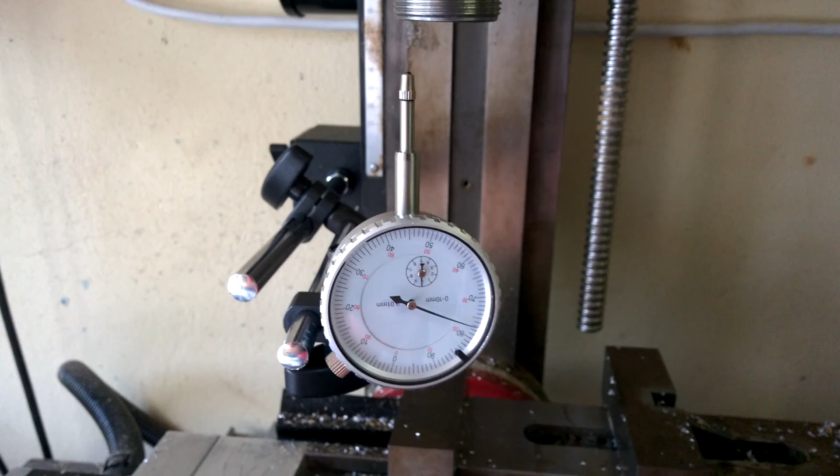You know shit gets serious when the dial gauge comes out.

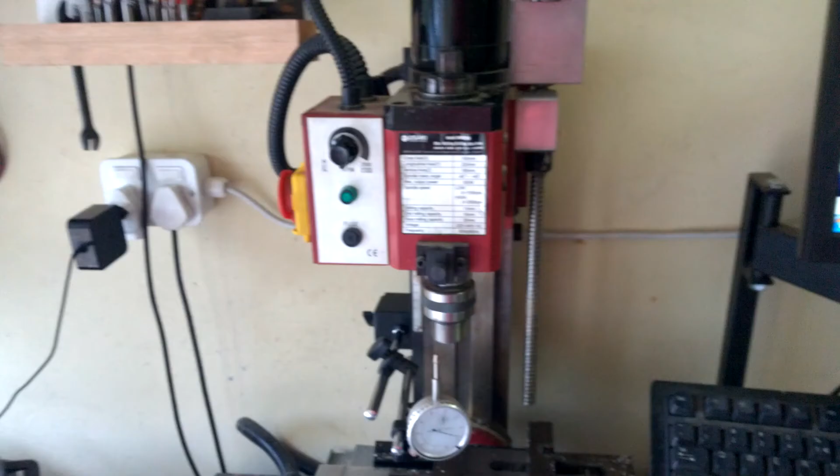I was very happy when I first got the CNC. This one, that one right there. Yes, that is a CNC. I was very happy when I got it, but it is rather old, and by rather old I mean probably upwards of 15 years old. So while it was probably really good when it was first built, since it is a mini milling machine, literally just called the mini milling / drilling machine.

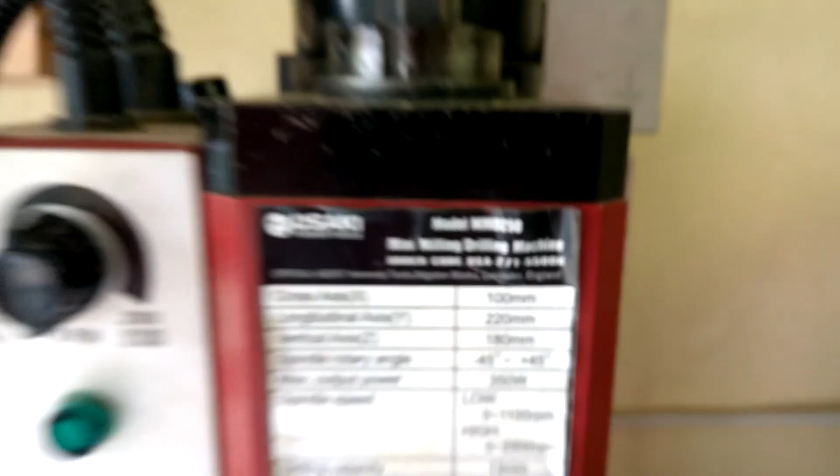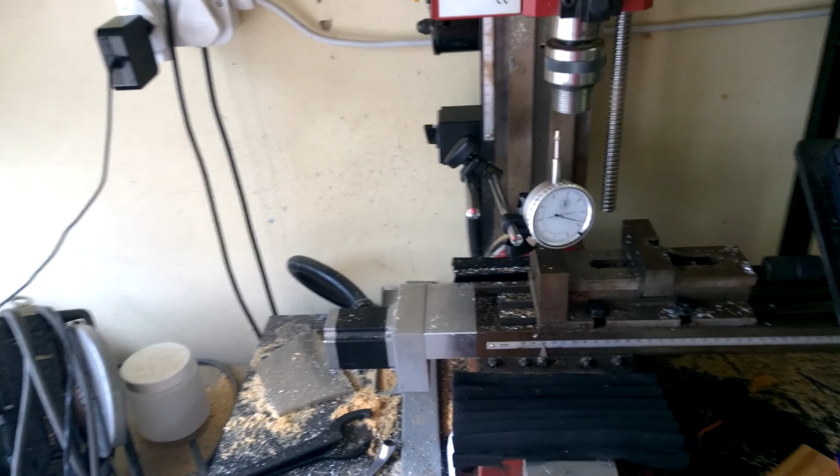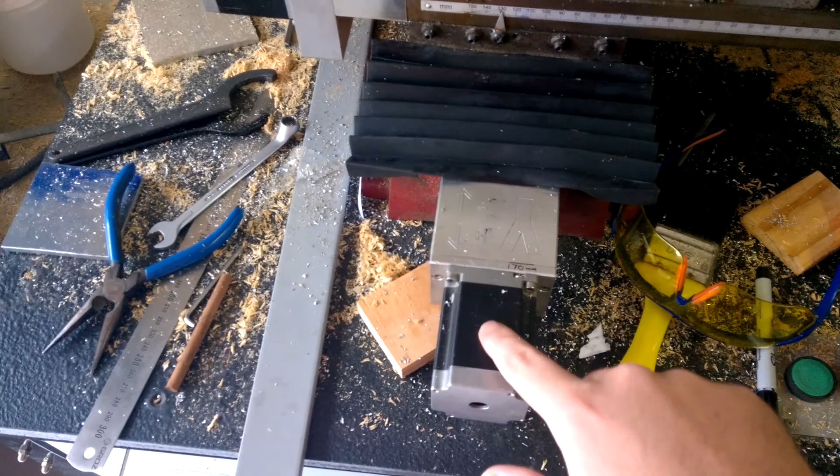It was converted into a CNC by a company local here, and that's great. It works, not perfectly, but it works very well. Only thing is, I have been having a lot of problems with overall accuracy. I tried just doing a circle, which is supposed to be a certain diameter, and it ended up being not that diameter, even after meticulously measuring the pitch and working out the steps per millimeter for this.

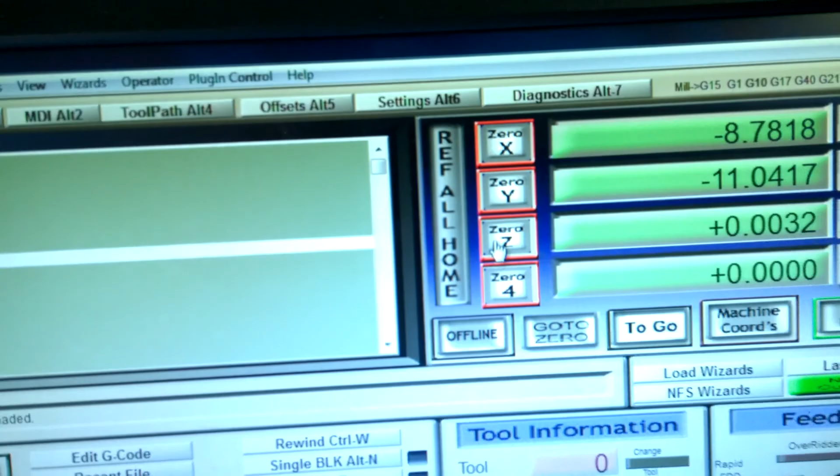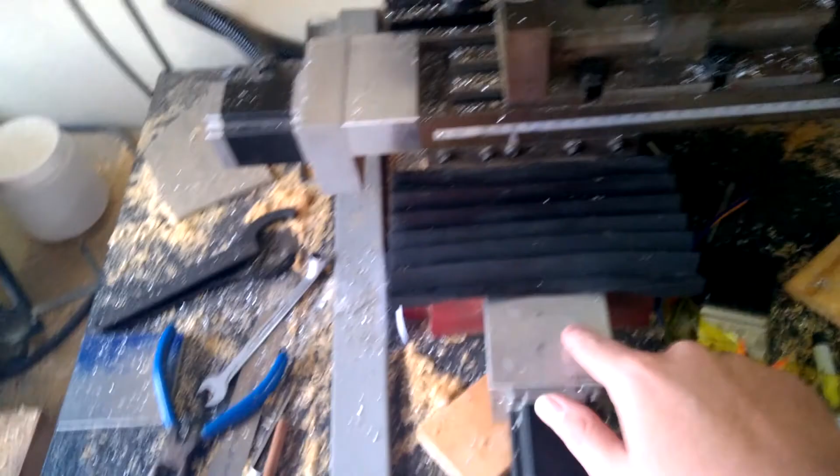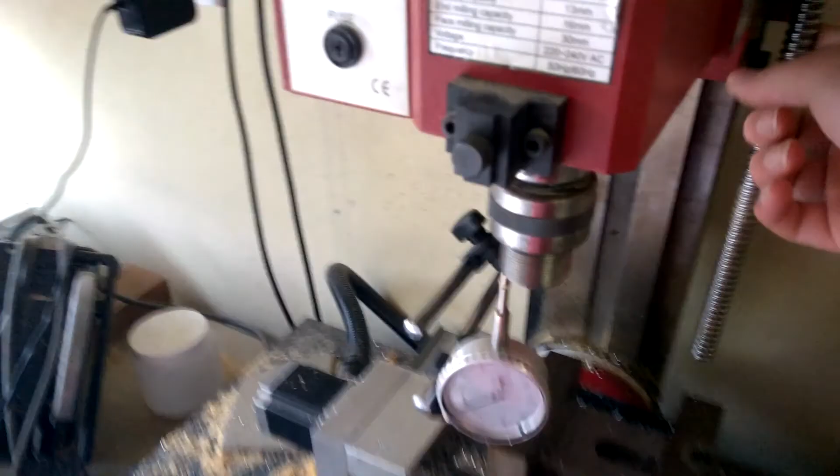And even after tightening the gibs, which were a pain in the ass because there's this aluminium bracket that covers up two of the gibs. So that was fun. These are ball screws, but I think over the years they have just sort of lost their, I don't know what the word is. They've worn down, or they need to be re-greased or something. They've lost their accuracy. So I could replace the ball screws, which I probably will at some point, but that is probably going to be a monstrous task.

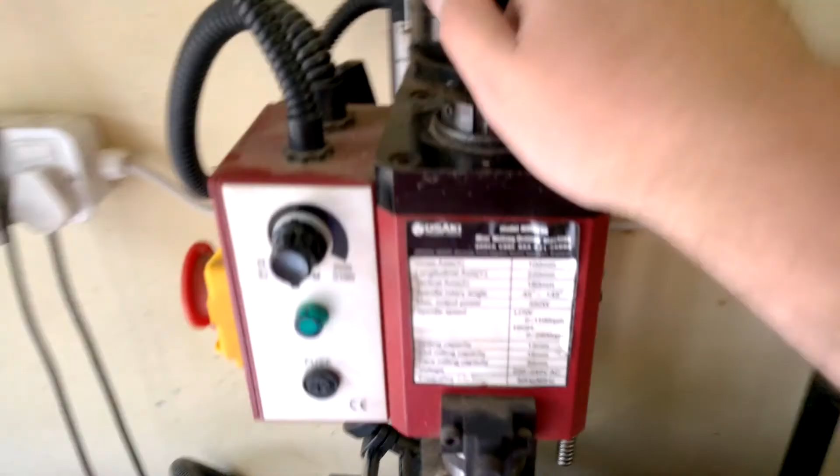And the ball screws themselves aren't that cheap. Replacing all of the ball screws will probably cost around 2,000. In South African currency, it's about 2,000 rands, which roughly equates to somewhere around $170, but it's not cheap. That and just a couple other things. The collet holder retaining nut, that's completely stripped.

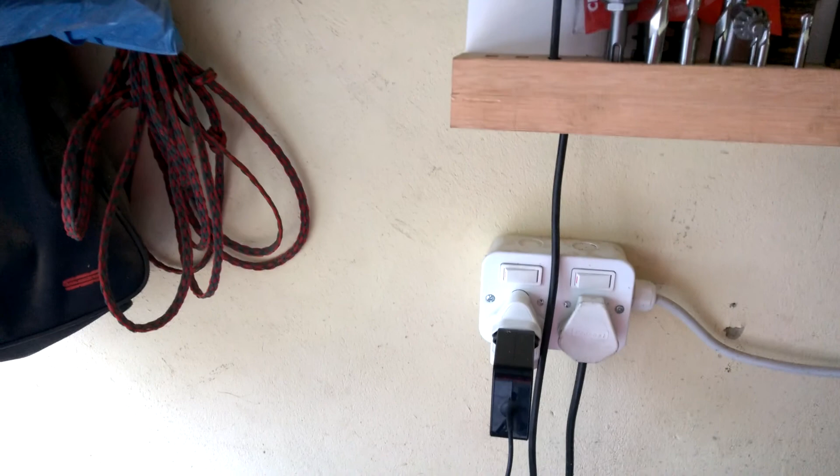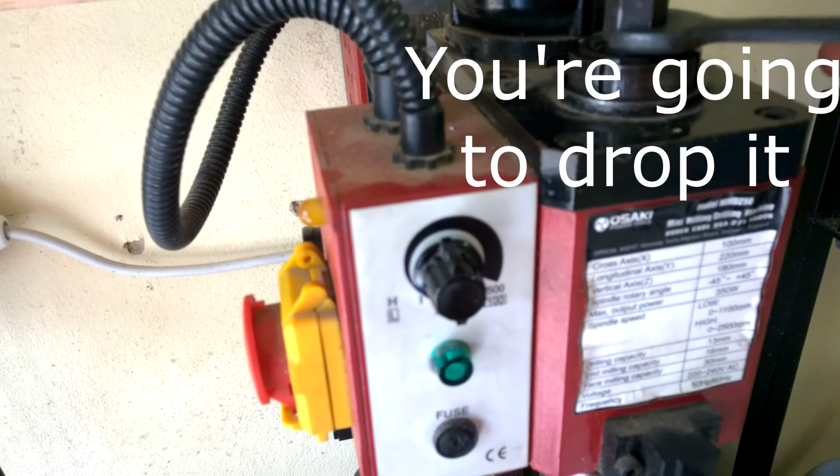Let me see if I can do this with one hand. That's going to be interesting. How the fuck am I going to do this with one hand? Okay, so that has to go that way. That has to go there. Oh god, this is going to be interesting. Is that right? Yeah. Fuck. Okay. So that should go there, and that should loosen. There we go. That loosened it enough, I think. I don't know if I even got that on camera. I was actually trying to get it out, so sorry.

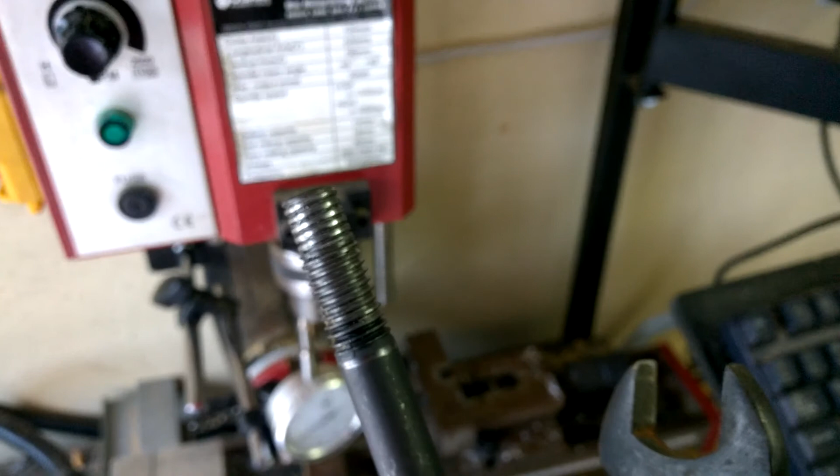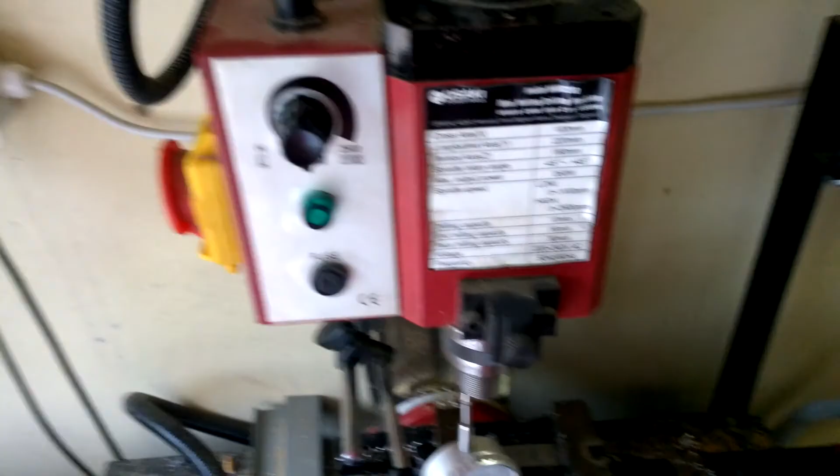But you can see those threads. Come on, focus. Those threads are fucked. But I think what happened at some point is someone cross-threaded it going in. Or someone put it in, threaded it, and tried to bang out the collet holder.

But I think it's okay because it's really rough most of the way. But then here, they thread in really nicely. So that sort of tells me that when it actually threads all the way, it's actually contacting all the threads. And there goes my thing.

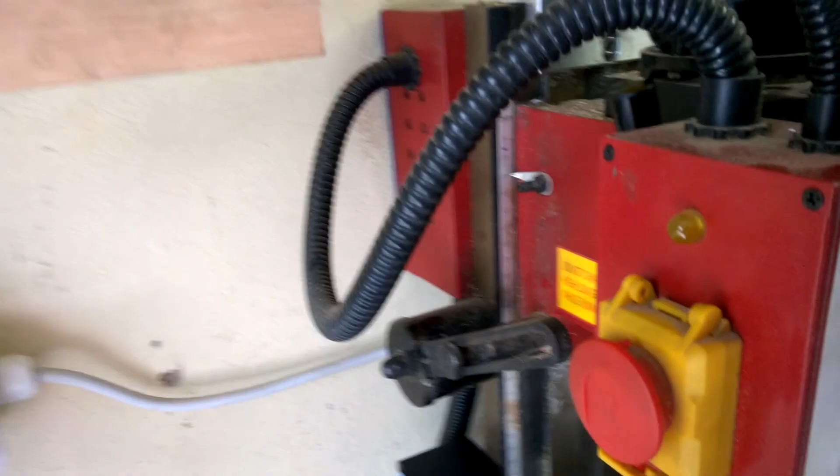What that tells me is when it's actually threaded all the way, it's contacting only good threads. Which is good, but with how much of a mission it was trying to get that out, I don't think it's going to come out even if that's completely loose. But anyway, that's another thing that needs to be done.

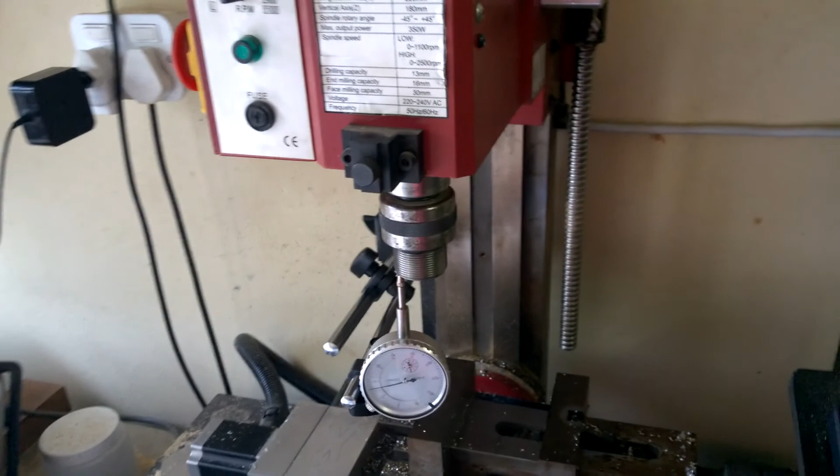Let me show you what I mean here. Right now I've got no backlash compensation on. What I am doing is going up and then down until I get past the backlash. There you can see I'm past the backlash going down. And I'm just going to get onto 0.

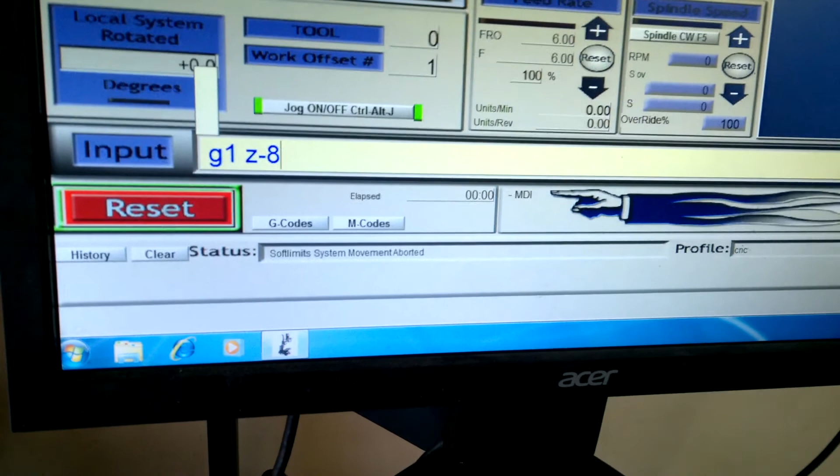With no backlash compensation added, I am going to go G1, Z, -8, F100, because it's a dial gauge, I don't want to completely mess it up. Oh, shoot. G1, Z, -8, F100. So it's going to go down 8 millimeters at 100 millimeters a minute, which isn't that fast. So it should go around 8 revolutions exactly.

As far as I know, the ball screws on X and Y are exactly the same as the ball screws on Z, which admittedly they may not be, but I can't easily measure those. So this should go around 8 times.

And you can see there, each little tick on those dials is 0.01 millimeters. So that is off by 0.05 millimeters. So that's 0.05 millimeters too little because it's backwards, so clockwise is... anyway, 0.05 is too little.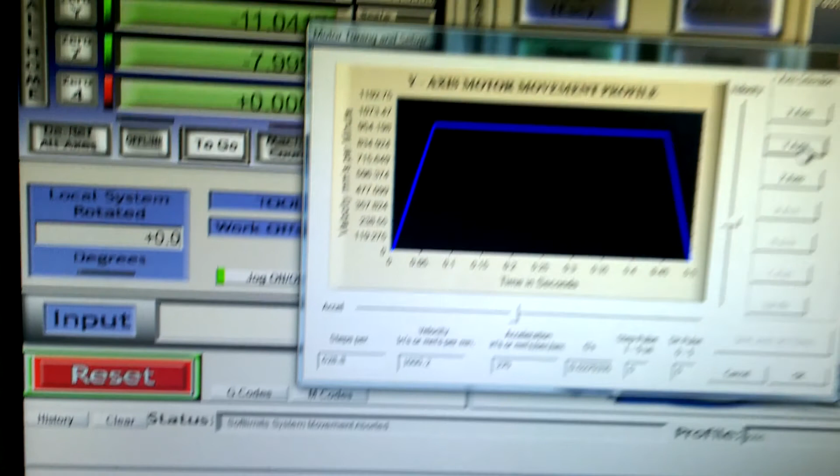So, motor tuning, you can see I've got the X - if it'll focus, there we go - the X, Y and Z. I've got the steps per millimeter exactly the same. That should, in theory, mean that they will move the same.

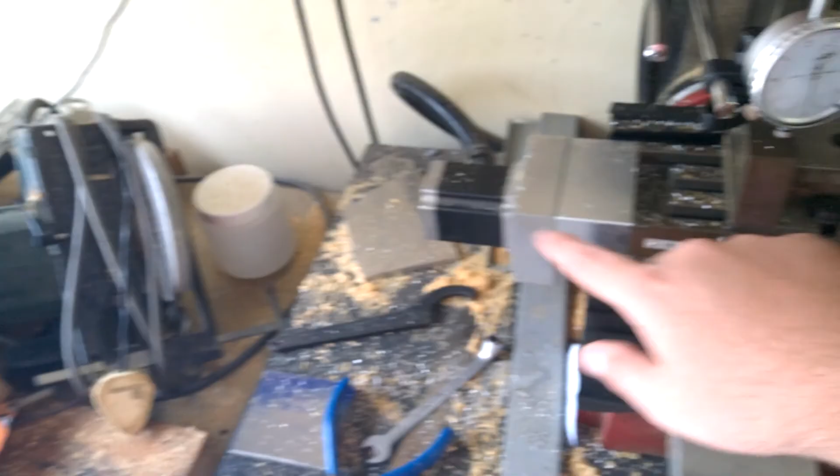I'm not going to reset the dial gauge now, I'll probably do it at the end, but when I move X and Y 8 millimeters, they move exactly 8 millimeters. And with backlash enabled, doesn't matter which way I move them, they still move exactly 8 millimeters.

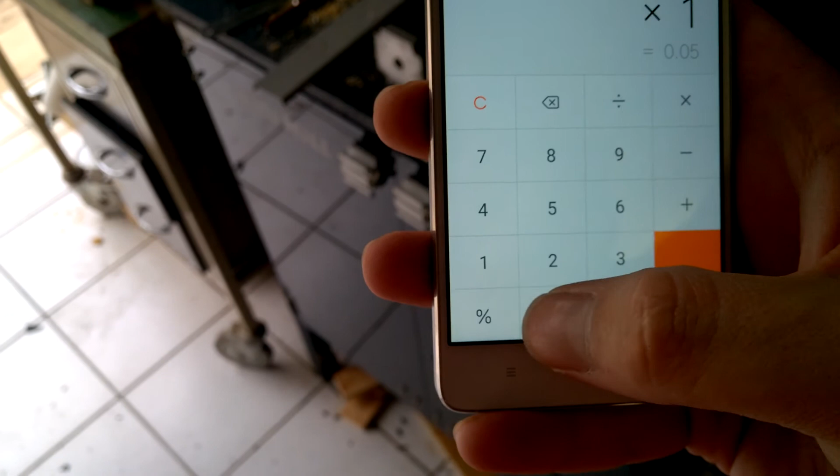So that tells me that if - let me just get to a calculator, and I know this isn't a perfect calculation - but it's supposed to move 8 millimeters and it's moving 7.95 millimeters. So, if it'll focus, 0.05 times 100 divided by 8 equals...

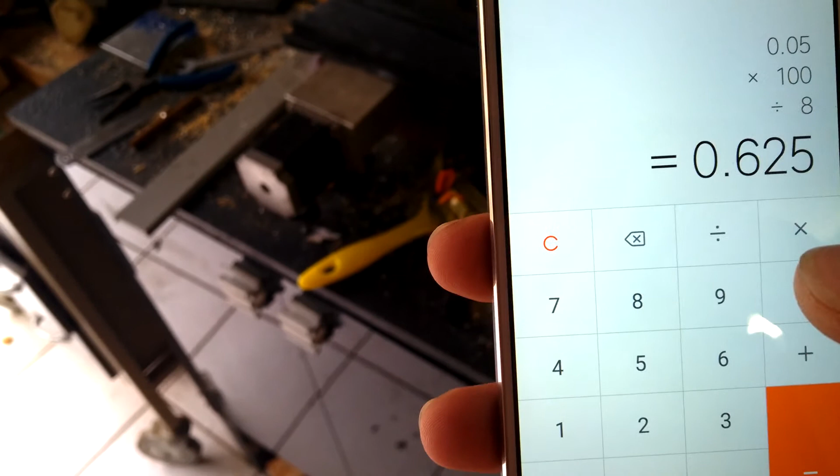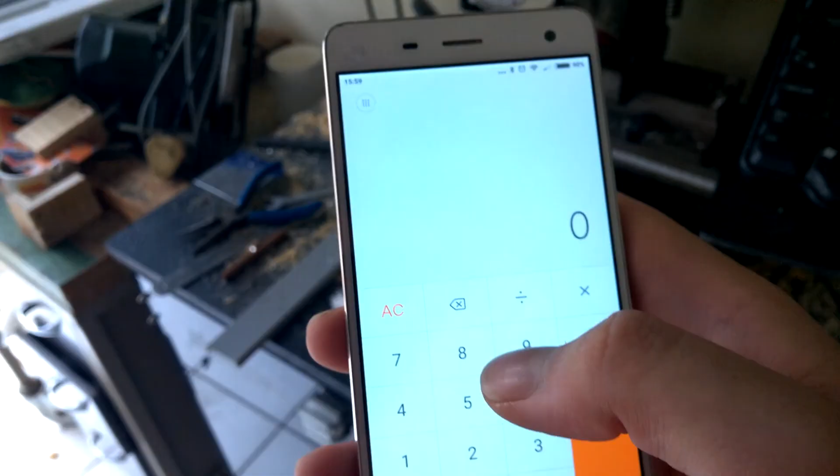So it is 0.625% too little. So I take that - 628.8, which I measured doing similar calculations. So I go 628.8.

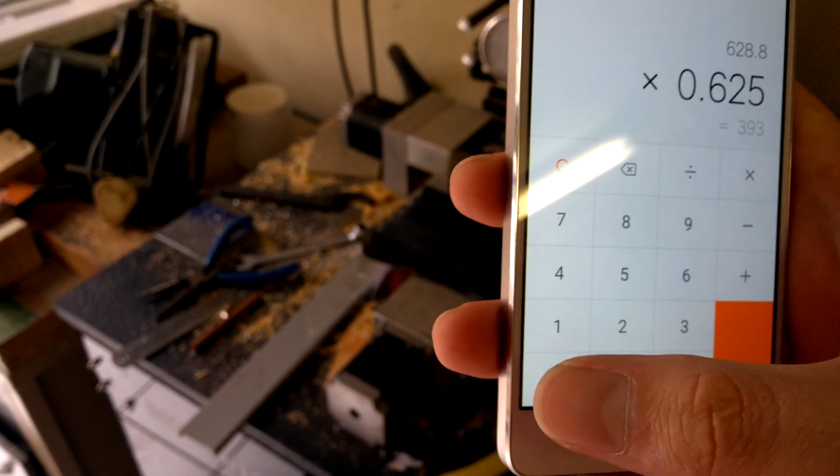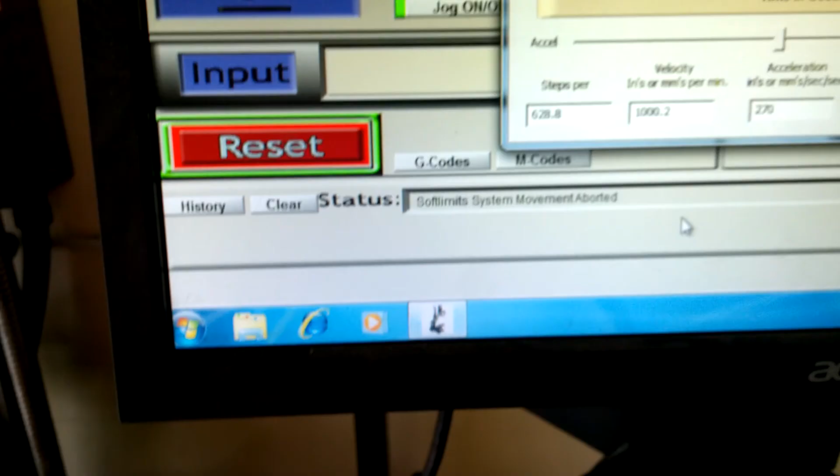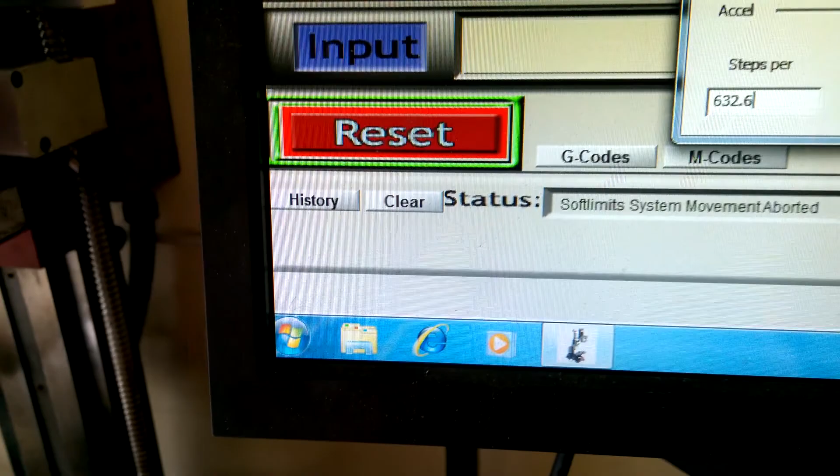632.6, make sure it's for Z. Save. Okay, and now rerun tests. Again, this is to make sure the steps per millimeter are correct without backlash - I'm not adjusting the steps per millimeter to include the backlash, which will mess up my actual movements.

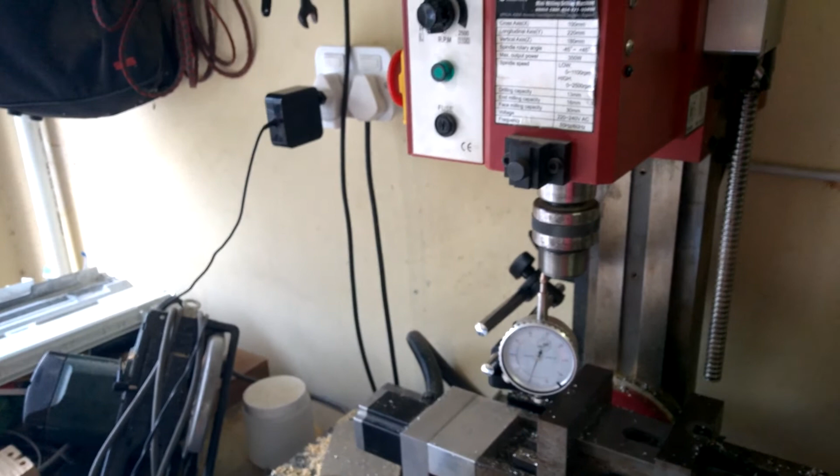Okay, and now I'm going up until it gets to 0, and I say that's Z0, and I want to go to 8 millimeters. And you can see that's a lot closer.

Ain't that cool? Okay, so if I want to go down now, just to check, I zero it, and I want to go down another 8 millimeters. Yeah, that's still not great, but it's better than what it was.

Let me just make sure, do a sanity check that I was doing that correctly. Go up 8 millimeters - you can see that's very close. Sorry if this isn't really in focus, I'm trying to record this while actually doing it. So I want to go down 8 millimeters, let's see if it does that again.

Now you can see that's within 0.03 of a millimeter, which is... so 0.1 millimeters is 4 thousandths of an inch, so 0.03 millimeters is within 1 thousandth of an inch, which is pretty good.

So that's not perfect, but I'm going to accept that, because this whole thing - you can see if I move that, the actual head moves. I've tightened up the gibs but I couldn't do it properly. Anyway, you can see if I move that, it moves about that much, maybe a little bit more. So I'll accept that.

So now, what I need to do to adjust the backlash: if I zero Z and then go down, so I know there's no backlash in that direction, and then go the other direction, just gently - so there, you can see the backlash is about 0.12 millimeters.

So config, backlash, and I go 0.12 millimeters. Okay, and now if I zero it and want to go to 8, let's see what happens.

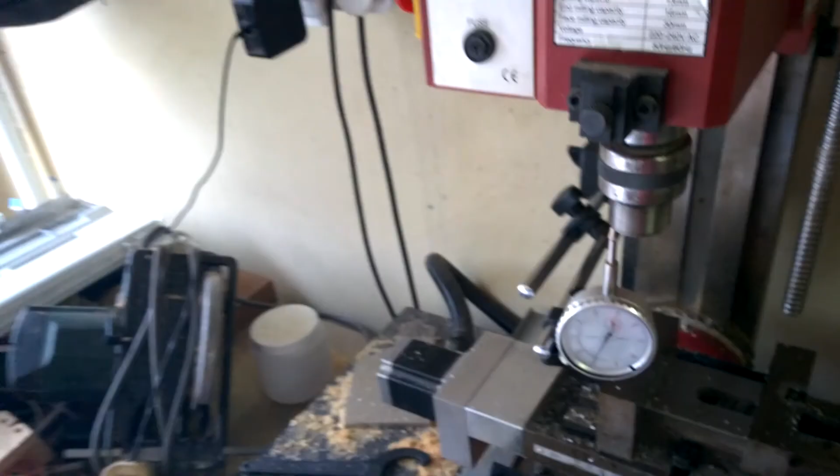Okay, that's good enough, and now if I want to go to 0 - and this is, I haven't changed the height or anything to compensate myself for backlash. Sanity check, going up again. You can see that's within 0.02 millimeters, which I'm going to accept. I don't think there's much else I could really do past that.

This isn't the most precise machine ever. It's meant as a hobbyist machine. You're looking at a hobbyist. That's a hobbyist machine, it's perfect. There's really not much more - I can't really get much better than that. Well, no, I lie, I can.

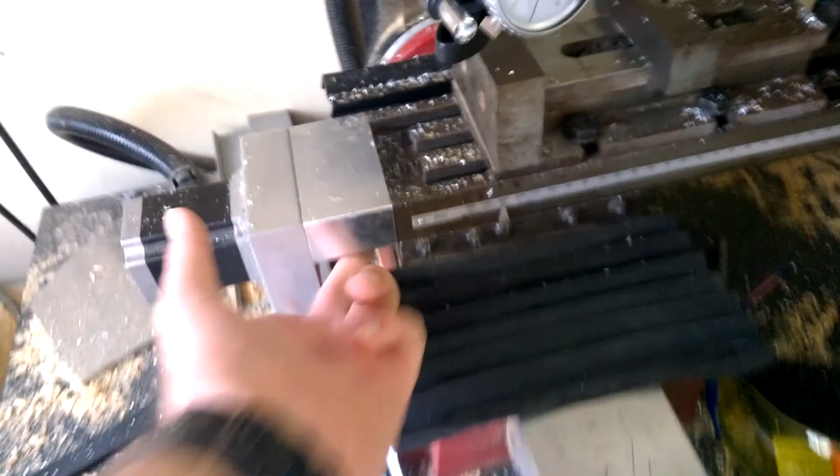I can replace the couplings, which you can see in there. Those are some couplings that they use - those are fine, I thought that was the issue, but it's not. I think it's in the ball screws themselves. If I really wanted to get pedantic about it, I can replace the motors, the couplings, and the ball screws, and true up the head. But realistically, I'll probably do it at some point. But the machine is good enough for now.

So I recorded a little clip of footage of myself doing almost this exact thing before I decided to check for backlash. I'll probably put that little snippet of footage in now.

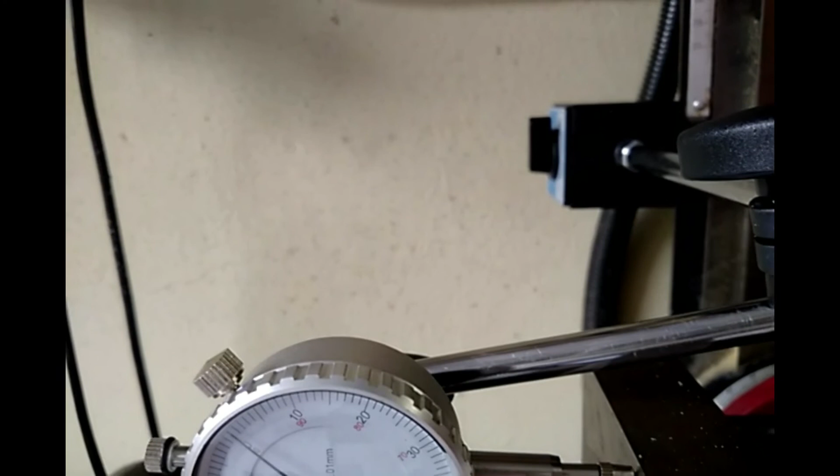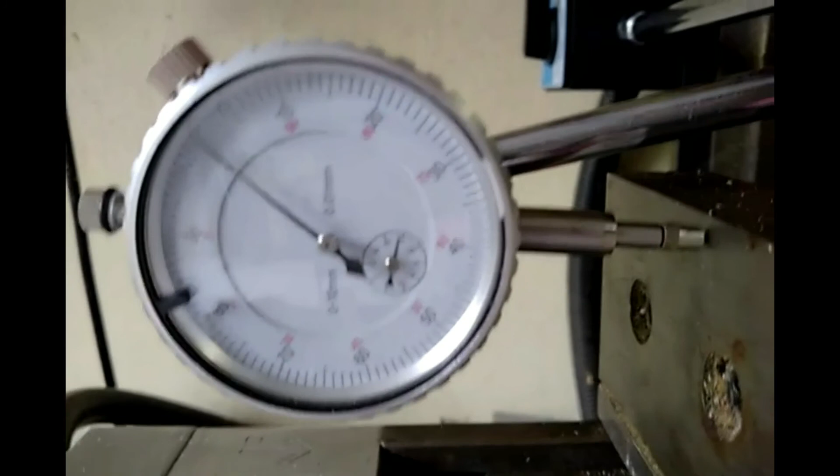If you'll look right now, if it'll focus, it is at 0. What I'm going to do is increase it by 5 millimeters. Come on, why are you no worky? Oh shit, sorry, decrease it by 5 millimeters. So this is going to go down 5 millimeters. Each little line on that is 0.01 of a millimeter.

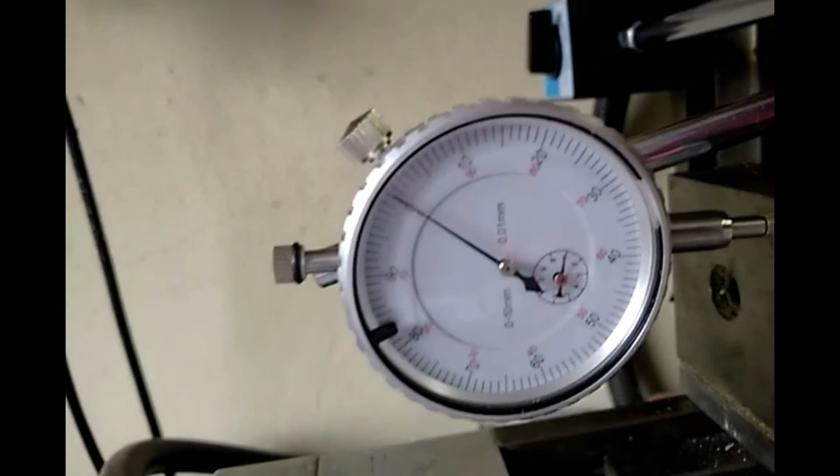How perfect is that? Let me go up again, another 5 millimeters. If that isn't within 0.01 of a millimeter, and I don't know what is, that's fucking perfect. So you can see that was really good.

The problem is I still wasn't getting a precise part because I wasn't compensating for backlash properly. I was compensating for backlash, but with the wrong steps per millimeter, so the parts weren't actually coming out right. So hopefully now that should be better.

I will change around the dial gauge to show you X. I'm not going to do Y because it's a pain in the ass to maneuver it everywhere, but I'll change the dial gauge to show you X. So I'll be right back.

Anyway, let's not linger on our mistakes for too long. So X is zeroed. I am going to move X 8 millimeters from 0. So you should see it move exactly 8 millimeters.

And you can see, without backlash, within... no, not 0.001 of a millimeter - 0.01 of a millimeter.

And now enable backlash. And if I now go to X0, it should be directly on 0. Perfect. Now to 8 again. This is with backlash compensation enabled. Not too great - let's try that again. That's pretty good.

You can see it varies a little bit. This probably isn't the most accurately perfect, precise dial gauge ever, but it's pretty good. So yeah, that's the machine trammed in.

I'm going to load in a block of wood and try to cut a 22mm circle for a bearing for a fidget spinner. So I will stop the video now and I will come back when I'm running the G-code.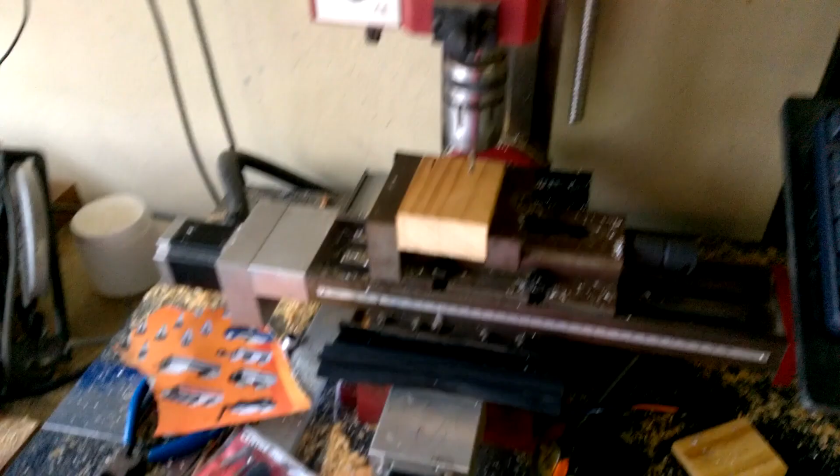Well, would you look at that - a perfectly and strategically placed block of wood, 6mm end mill, and G-code path. Now all that's left to do is to press cycle start and hope nothing bad happens.

Yes, hand on ready, spindle should start. You'll notice, I don't know if you can hear me or not, but there's like a tick every time it changes direction - that's compensating for the backlash.

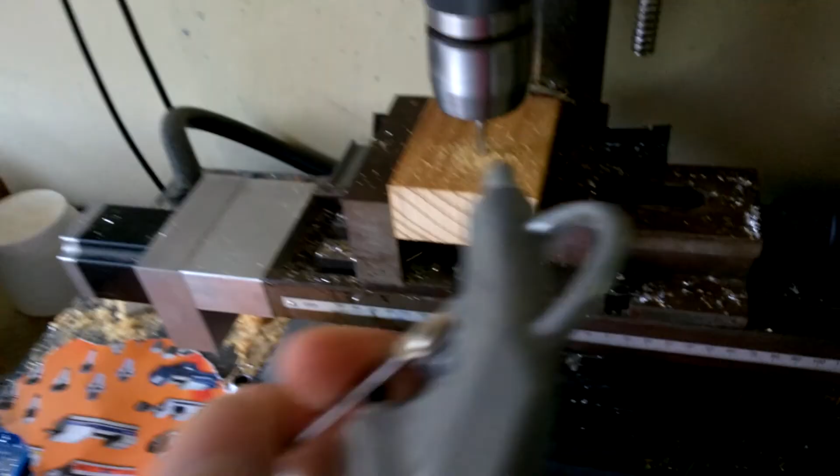And there it's cutting. Just adding some air - don't want to load up too many chips. And you can see there it's cutting the perimeter.

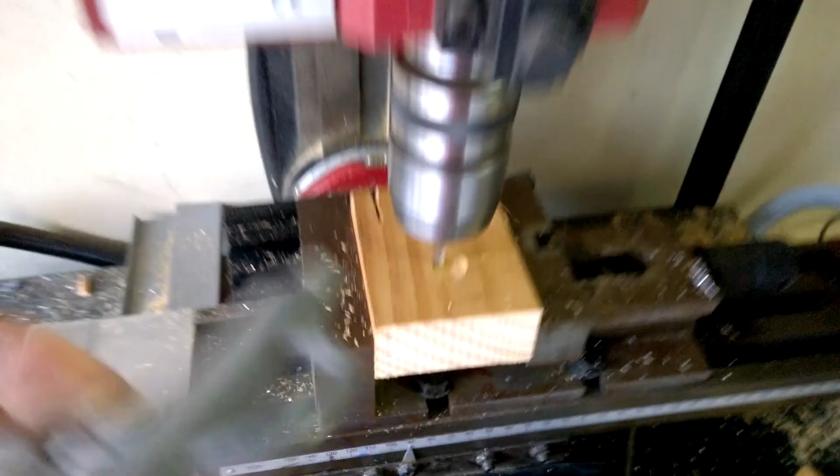I need one of those little things that are attached to here for air, because if I'm running something that's longer than like half an hour, this does get annoying. G-code, it's almost done.

Okay, cycle stop. No one cares about you. Okay, not you, compressor, everyone cares about you.

Let's take that out. Shut off the spindle. Now I can't remember if I added or left some stock to leave in Fusion 360, because that's what I used to do. If only I knew where the digital calipers are.

There they are. Why they're underneath the tap set, no one knows. Let's see. If it says something like... what does that say? 21.6. 21.6, it's meant to be 22.

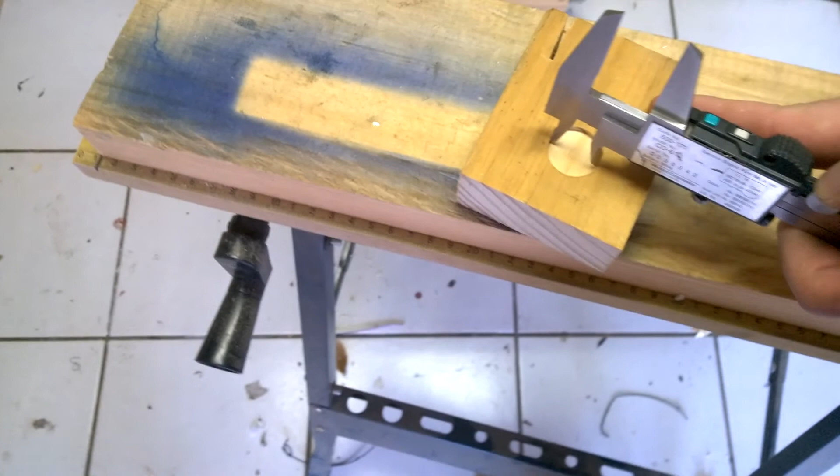So if it's a 0.2mm stock to leave, that's perfect. If not, then I don't know. Let me just do that again. Yeah, 21.6mm. If it's a 0.2mm stock to leave, which it could be, then that's perfect. If not, then... I don't know. I'm probably only going to use this for visual stuff and not precisely accurately machined stuff. But let me go check Fusion 360 and see.

So I'll see you at my computer, I guess.

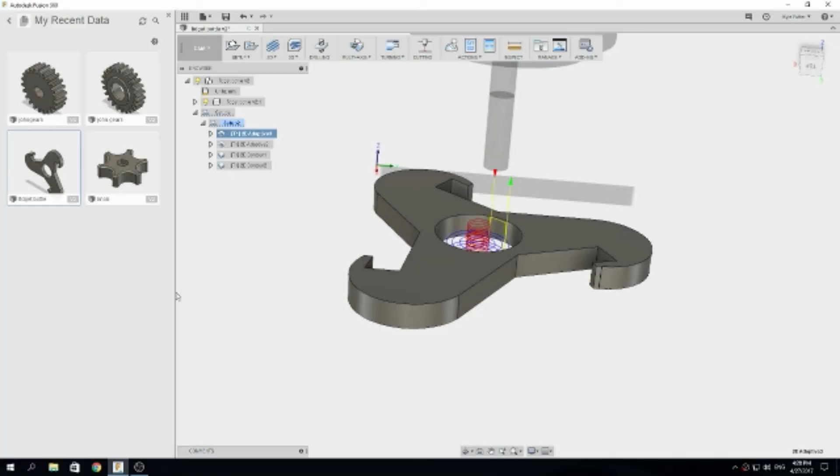Okay, so I'm here in Fusion 360, and here is the model. This is the toolpath. So if I edit it, you can see I set 0.1 millimeter stock to leave, which would mean 21 point... I got 21.6 millimeters. So then once it's done the 2D contour or the final path, after this it should have been 21.8 millimeters. So 0.1 of a millimeter on either side of a circle brings 0.2 millimeters.

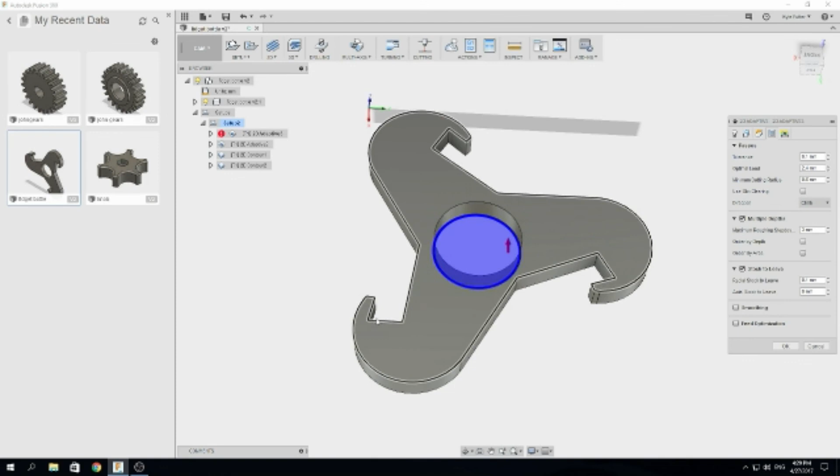So that means I didn't go down all the way, because if you look at the tool path going around - if you've paid close attention to the video, just speed that up a bit, quite a lot - you can see it does two passes. So I don't know if it's on the last pass that it's taking it to its final diameter, although it should just take it to the final diameter in one pass.

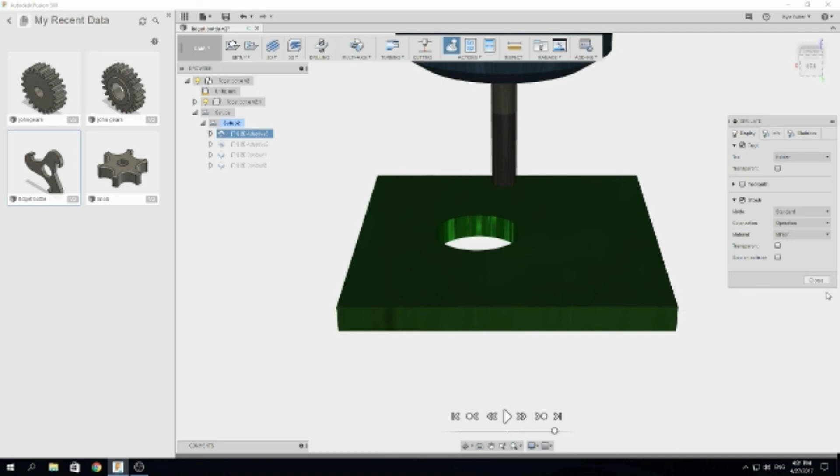Every pass that it does, it could - I'm not sure, I don't feel like running it now. So in an update video, I'll tell you whether letting it go through the full cycle brings it to its final depth, because it's possible that even though it's a roughing pass, it'll do multiple roughing passes in the same pass. So when it does the first, it won't take it to its final dimension. Which is possible - I'm not saying it's not, because of tool deflection and all that special stuff in Fusion 360, but that's a possibility.

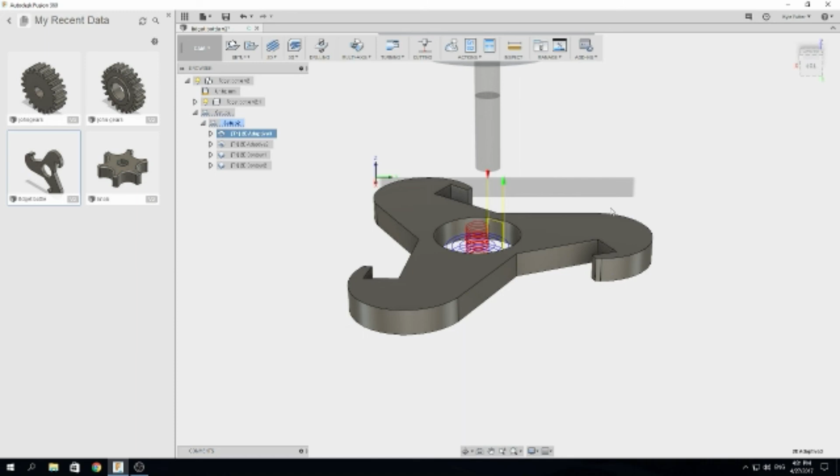But I will tell you that when I did this before, I don't think I was getting 21.6. I was getting something else, but I don't know what it was. Anyway, for now I'm gonna call that good. I can always compensate for that in my CAD if I want to, for something like this.

This, if you're curious, is meant to be a fidget spinner bottle cap opener. You can't see me now, I'm trying to demonstrate with my hands. That's supposed to be a bottle cap remover, and there's supposed to be a bearing in there, so it's multi-purpose. But anyway, that's kind of good for now, I think.

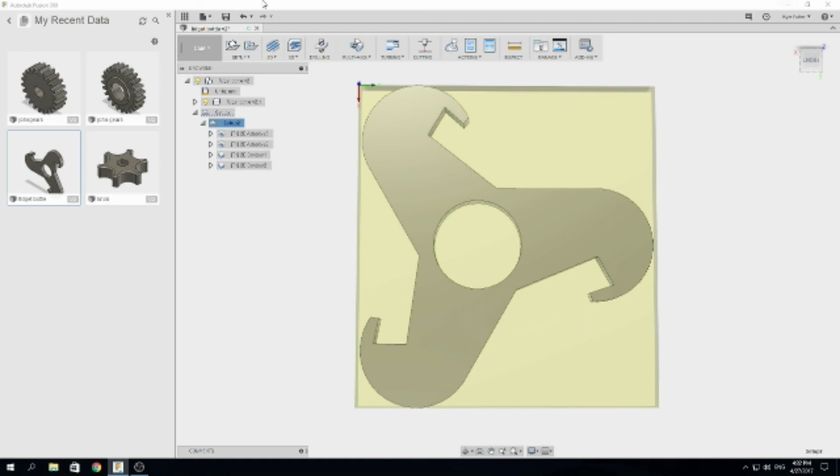My room is dark right now, so I'm not going to turn the camera on, but yeah, that's pretty good for now. You should see a video about this soon, once I figure out the clamping in aluminium that I want to do, because I want to make this in aluminium so it's metal and not just plastic, which would break trying to remove bottles.